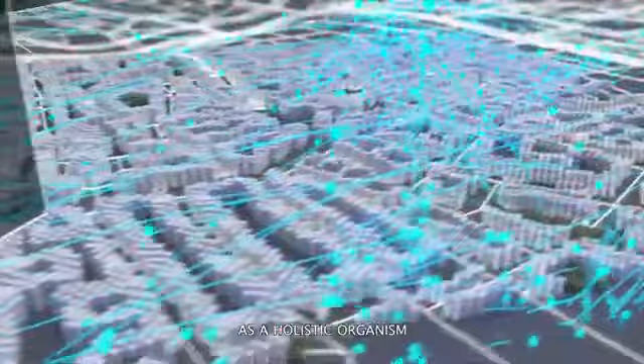Driven by the desire to understand and simulate the environment as a holistic organism, ENVI-met, a microclimate simulation software, was developed based on objective scientific methods so that the effects of proposed architectural and planning solutions are measurable.

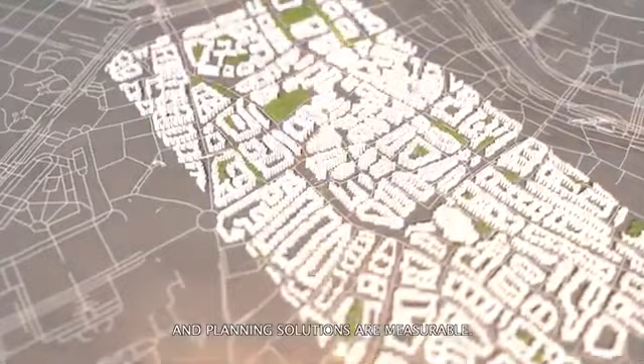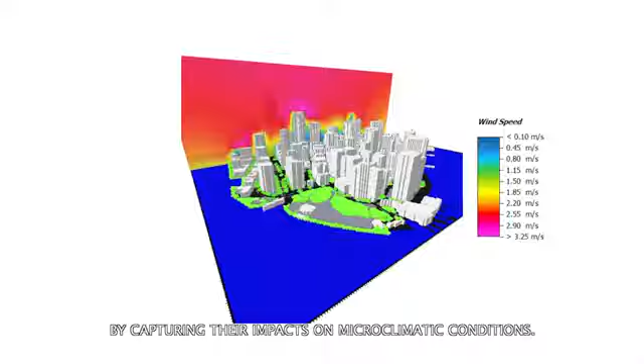ENVI-met is a holistic three-dimensional model used to simulate complex urban environments and to assess the effects of green architecture visions. It is designed for a wide range of temporal and spatial inquiries and can reveal credible differences in urban geometry by capturing their impacts on microclimatic conditions. ENVI-met includes the capacity to analyze a wide array of spatial scales, from systems as small as a courtyard to as large as an entire city, depending upon the goals of the project.

To create sustainable and resilient living conditions, this software will help to minimize heat stress, air pollution, and wind risk by providing up-to-date numerical simulation techniques to elucidate the impacts of our architecture and planning proposals on the urban fabric in a fashion that goes beyond intuition and assumption.

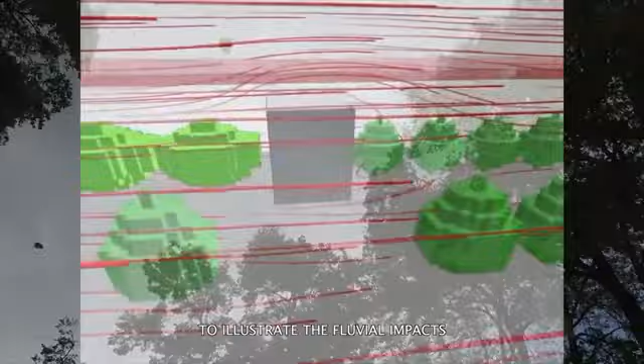There is an endless variety of building and ground plane material options made available through the ability to specify parameters such as thickness, albedo, specific heat, density, and many other factors. The software also enables the calculation of wind dynamics in complex urban settings to illustrate the fluvial impacts of different urban design decisions, which can be used to inform ventilation or pollution dispersion.

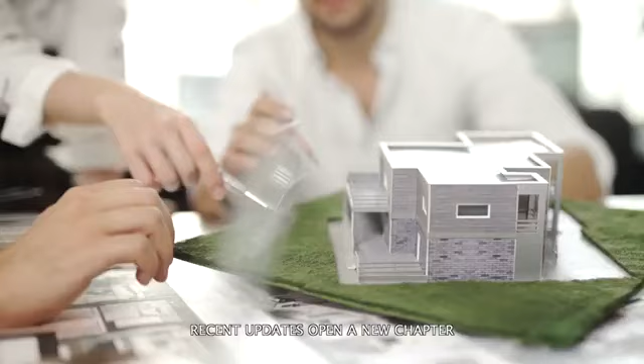In order to integrate ENVI-met into existing workflows of industry professionals, recent updates open a new chapter in how users can construct models and simulate data. Moving away from grid-by-grid editing, MONDE enables vector-based approaches that make it easier to generate models or to change spatial resolution with just one click. Users can import existing vector data, such as CAD and GIS shapefiles, in addition to accessing the worldwide database of OpenStreetMap and OpenTopography to create ENVI-met models.

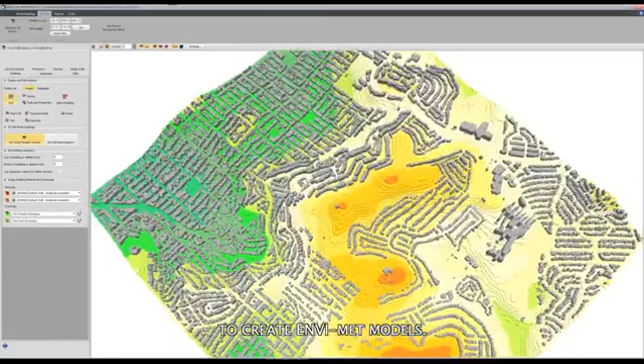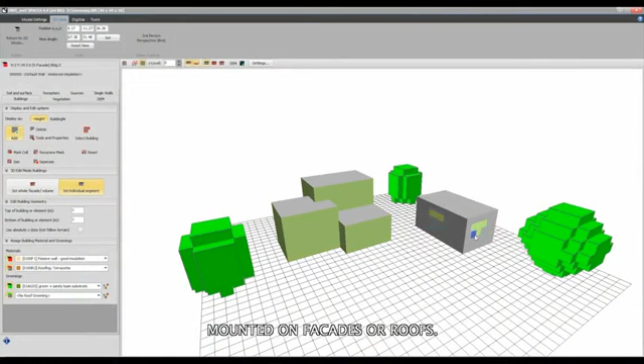With the application of vegetated infrastructure on roofs and walls becoming an important tool in green building design and urban planning, ENVI-met's new green wall module enables the user to accurately simulate the complex interaction of vegetation, substrate layers, and fixation materials mounted on facades or roofs. In order to produce valid results, the modules take into account a multitude of parameters, including the opening and closing of stomata based on the validated plant model and the effects of multiple reflections and local infrared radiation.

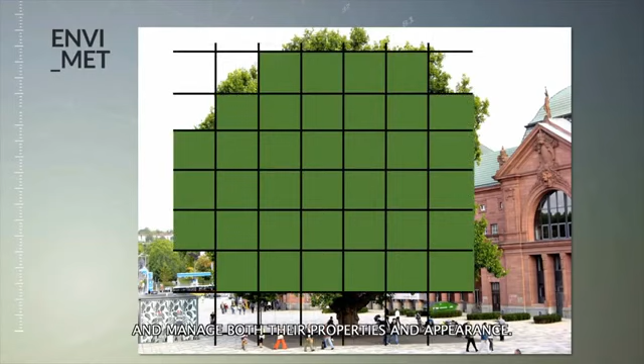With Albero, the user can simulate complex three-dimensional plants and manage both their properties and appearance. This also enables the creation of new plants to emulate specific species of interest, accounting for features such as root shape, canopy size, leaf area index, leaf albedo, and the ability to distinguish between evergreen and deciduous species.

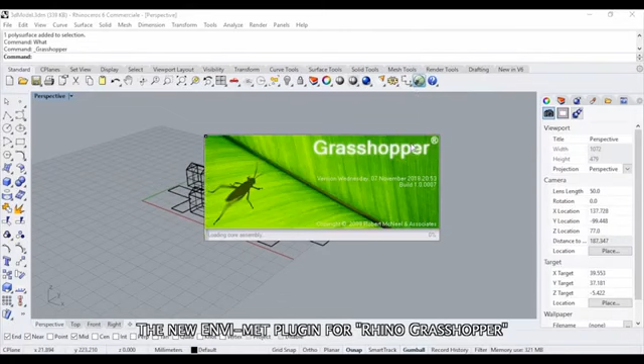The new ENVI-met plugin for Rhino Grasshopper has been developed in the Ladybug tools. This plugin enables users to convert Rhino 3D designs to ENVI-met model areas and run simulations without even opening the ENVI-met software suite. Since our users are typically already experts in their core applications, this makes it easier and faster for professionals to adopt these tools.

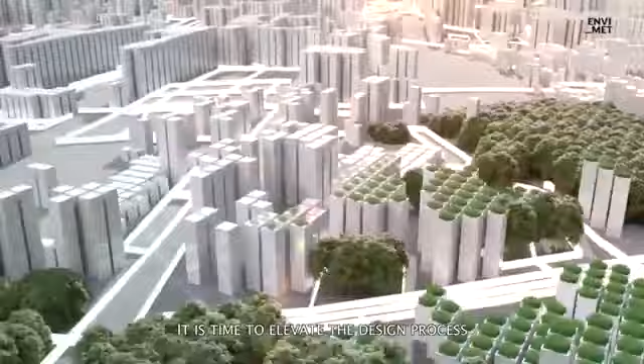In order to mitigate the impacts of climate change and population growth, it is important that we no longer operate using trial and error, but instead be more critical of site performance. A more holistic approach can resolve the dynamic interactions between plants, buildings, and the atmosphere to quantify site-specific environmental performance metrics. The future of architecture and planning is here. It is time to elevate the design process to a new level.